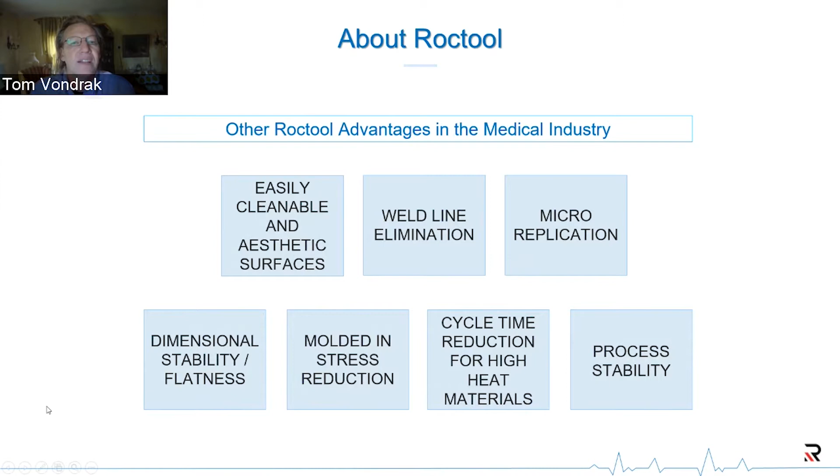Okay, a little bit about Roctool. Roctool is a technology company, and we focus our technology in the area of inductive heating of production tools. We have 190 worldwide patents, and we are a global company. Global in that our staff is from 10 different nationalities. We speak multiple natural languages. We have over 50 plus employees worldwide, and we have over 88 global clients.

We have literally tens of millions of parts produced in our high volume production proven methods for heating tools. And we have systems deployed around the world. Currently over 350 system installations with customers producing production parts.

We provide all the components needed to do inductive heating within your tool. We also provide all of the capital equipment. That can be an induction generator and other peripherals such as an interface module and cooling units to allow you to both heat and cool very quickly. And we wrap all of that with great support globally for installation, for process startup, training, and maintenance, so that at the end of our first encounter, you end up with a molder that knows how to use our system and produce parts and solve problems as they come up. Next.

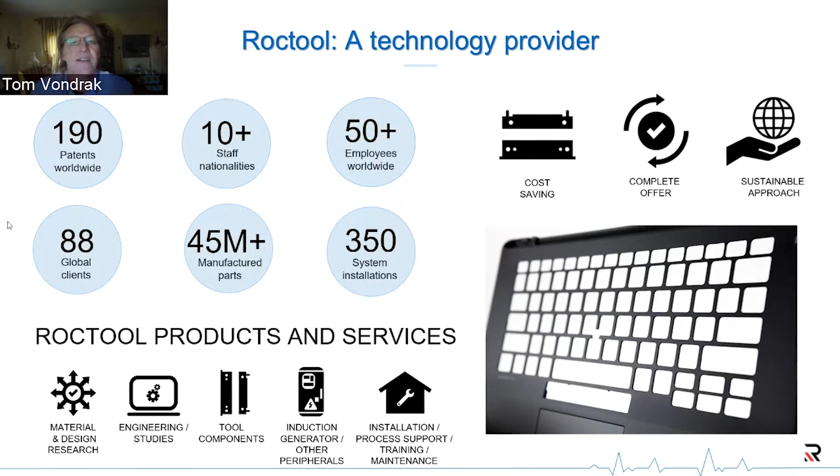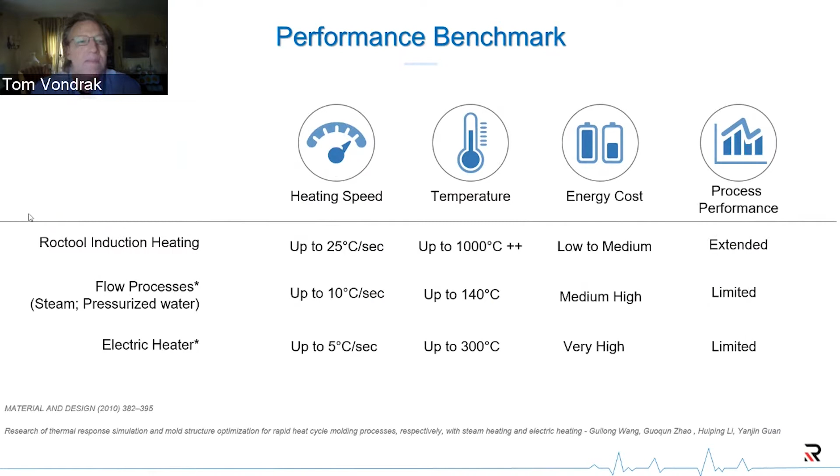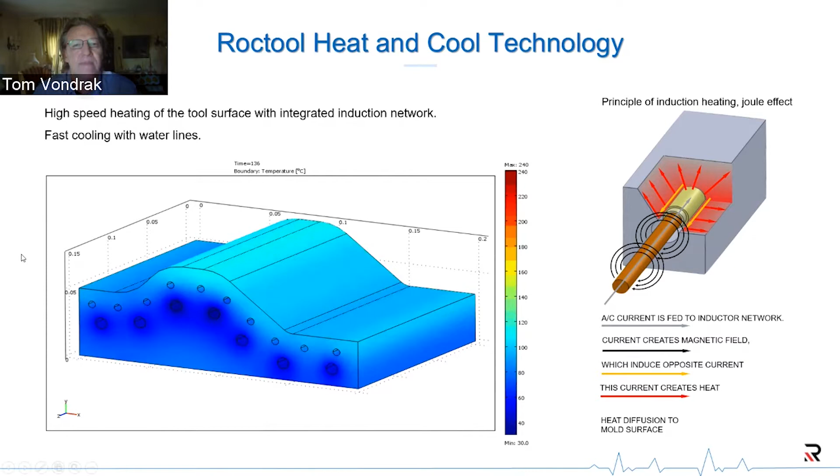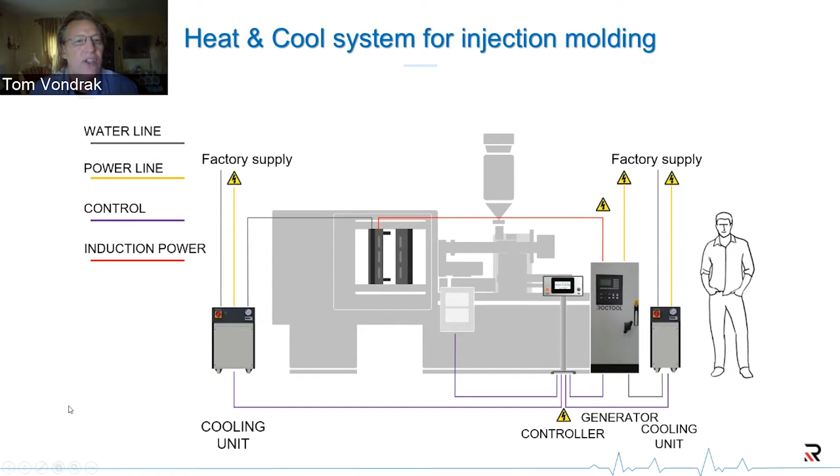Okay, that was very quick. Hopefully you've got an understanding of induction and how we implement it. And I will now turn it over to Vito.

Welcome back again to Belgium, warm and dry Belgium, I guess, as most of Europe right now.

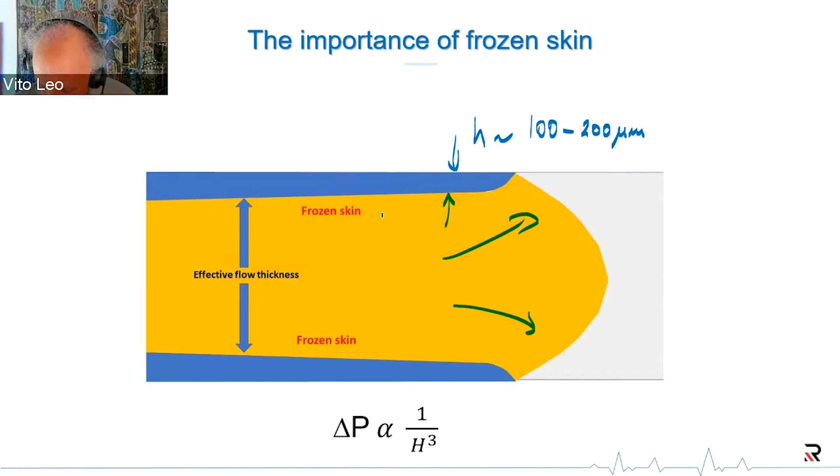Now, what is the order of magnitude of this? It's not uncommon at all to be between 100 and 200 micrometers, so 0.1, 0.2 millimeters. It's fairly typical. Now, you can imagine that if you're molding a 3 millimeter thick part, losing 0.2 millimeters of flow channel on each side isn't a dramatic loss. But if you're trying to make a part of 1 millimeter thickness, or even lower, you have a substantial effect of this reduced effective thickness, because the effective channel for flow is going to be the nominal thickness minus 2 times the frozen skin.

Now it's interesting to go back to some fundamental physics. Physics shows that if you keep everything else constant for a given filling rate and viscosity, the pressure drop you have to fight against, or the pressure you have to provide with your molding machine to fill a given cavity, is proportional to the reciprocal of the third power of the thickness.

Now, if you have a frozen skin, this H is actually H minus 2h, of course - it's the effective channel. I like to use a simplified approach. If we linearize this and think in terms of percentage, we can say that if 10% of the channel is blocked by the frozen skin, that will give you a pressure increase of about 30%. That's because of the cube. So it's just a linear approximation of this complex formula. Every time you lose 10% of effective thickness, you need to add 30% more pressure. So you see it's a very strong effect.

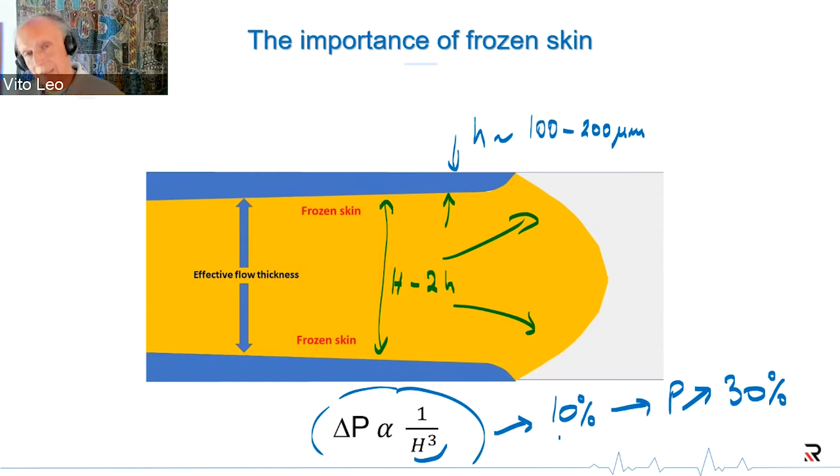And if you can somehow reduce the frozen skin, you could get a huge benefit. Now, 200 micron is 10% of a 2 millimeter plate. Then you have one frozen layer on each side, so with 100 micron on each side, you lose 10% on a 2 millimeter plate. But if you're making a critical medical part that's only 0.8 millimeter thick, you're losing much more than 10%. So you will see an increase in pressure to fill that could be 50, 60, 70, 100% - a very strong increase in pressure. Of course, you could run your mold much hotter, but it doesn't make sense with a conventional process because the timing gets completely off and the economy collapses.

Now let's move to my second and last slide to illustrate the benefit of this process and why it is so useful. The easiest thing to do is go back to a very old plot. For those who have been around a while, they might remember this was the single plot Moldflow was capable of producing 35 years ago, well before finite elements - pressure to fill a cavity as a function of filling time.

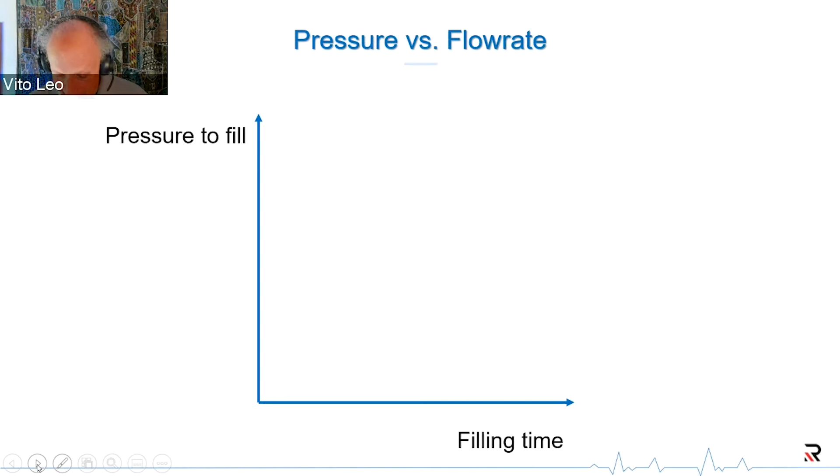It typically looks like a U-shaped curve. So what this means is that if you want to fill very fast, you need to push a lot - that's basic mechanics. You want to go fast, you have to push hard. As you decide to go to a slower filling rate, you need less pressure, so you can fill your part with less pressure. But all of a sudden, in a classical cold mold injection molding process, you will experience a dramatic upturn at some point - the slower you go, the more pressure you need.

Now where is that coming from? From the frozen skin. Because we're going slower, we give more time for the melt to freeze off. The actual thickness of the frozen layer will be higher, so the percentage of blocked channel will be correspondingly higher, and the pressure will go up. It goes up so dramatically that you reach a point where you produce a short shot - there's no way to fill your cavity. That's why there's a concept of minimum filling rate, and a concept of optimum filling time, which you could identify as the minimum of this curve.

Now, if you do this experimentally with a given part in front of your machine, you may not be able to get the full curve, and Mikael will show you some results later. Depending on the part thickness, you might be highlighting more the left side of the graph, or maybe watching more the rising right side of the graph. But in theory, it's a full U curve.

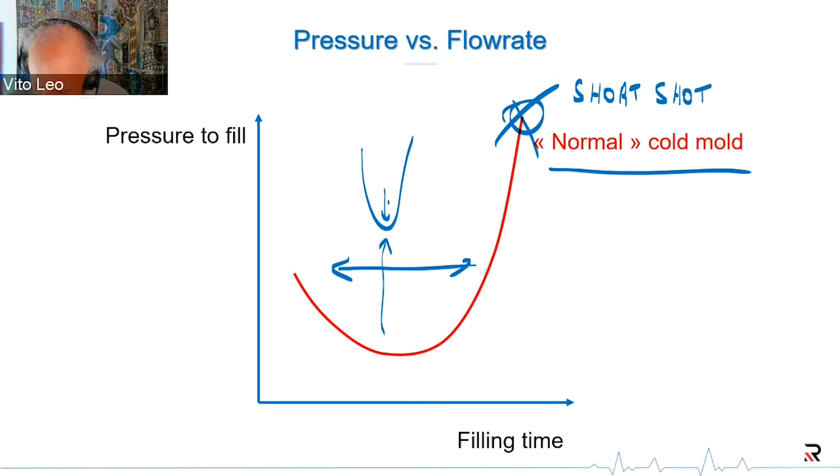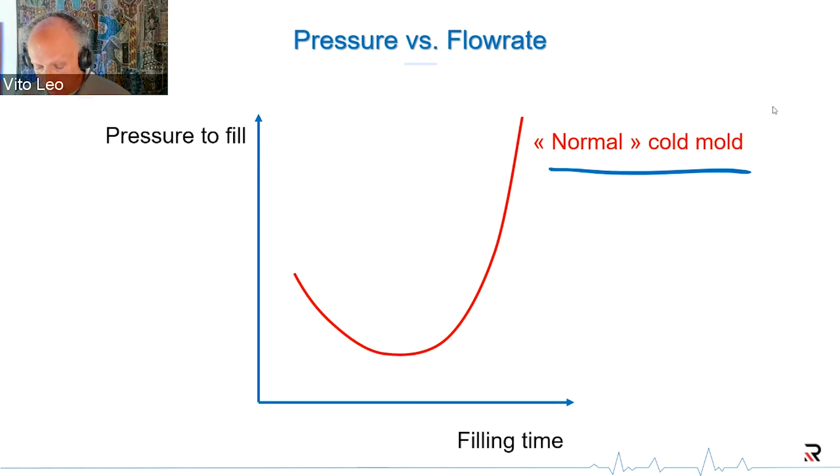Now, before I turn the microphone to Mikael, who will show some results, let me show you on this theoretical U-shaped graph what happens if you're able to use a very hot mold. Now, this is somewhat optimistic, and to be honest, it corresponds to a mold temperature equal to your melt temperature.

Okay, in this case, you have absolutely no frozen skin. You have no melt cooling near the edges, and that will give you this hyperbolic, constantly decreasing pressure. So you can go as slow as you wish, and you could say the processing window is now infinitely wide. Now, obviously, that's not reasonable, because despite the efficiency of the induction heating, you cannot really bump your temperature that high. Technically you can, but it wouldn't be such a great idea in terms of cycle times.

So classically, as you will see in polycarbonate examples to follow, you would put the mold temperature pretty much at the glass transition, which will allow you to have no frozen skin, but it's still cold. It's still 140 or 45 for polycarbonate. So you will end up with something like this. This is a more realistic Roctool-based process, but you see the tremendous benefit in terms of processing window.

I'll give the word now to Mikael, who will show you actual results on disc and spirals just before we move to the live demonstration. Thank you.

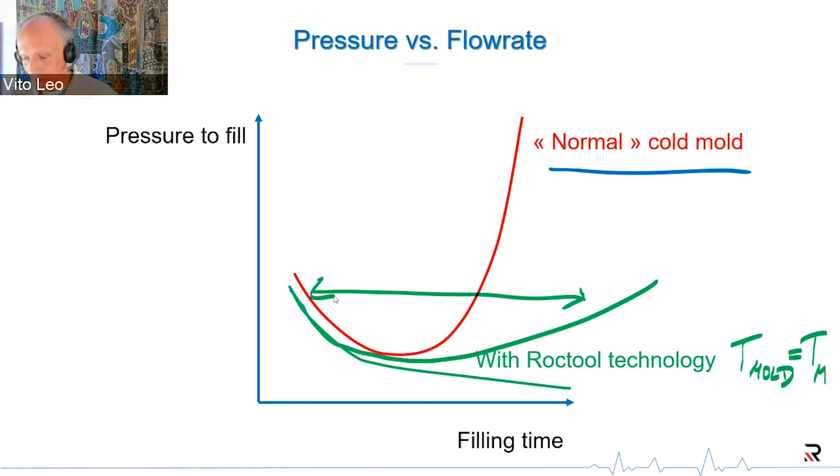Thank you, Vito. So I am Mikael Chailly, Head of Engineering for Roctool in France, and I will present you numerical studies that typically illustrate what Vito presented as a global physical concept.

So if we take a look at this first study of flow extension, we consider a central disk of 300 millimeter diameter with a central injection, and we inject two different materials, two of them being Makrolon grades from Covestro that are used in the medical industry. And we tested different disc thicknesses ranging from 0.5 up to 3 millimeters. We will not present all of the results, but a brief nutshell of certain results.

In terms of mold surface temperature, we have considered three configurations. The first one being the reference for conventional molding, the mold surface temperature would be set up at 90 degrees C on both sides. Then we consider that we have implemented Roctool on one side, so on this side the temperature would start from 160 degrees C at injection start and getting down to 100 degrees whenever we demold the part. And the third configuration would be to heat both sides with the Roctool system with the same temperature profile, starting from 160 down to 100 degrees C.

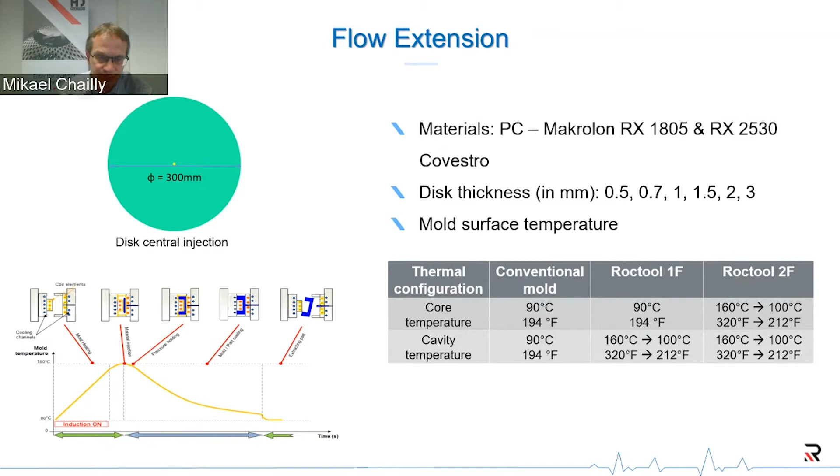So when we talk about those 160 degrees C down to 100 degrees C, we are basically only cooling all the time whenever the material has entered the mold. If we switch to the next slide.

Here we see just a basic illustration of the filling behavior. We have considered one disc at 1 millimeter thickness with one of the two Makrolons, and we have set up a limit pressure from the press, which is 2,400 bars on both sides. Considering about 2 seconds in injection time, we managed to fully fill the disc in Roctool conditions with this pressure limit, whereas in conventional molding we have this short shot that Vito mentioned.

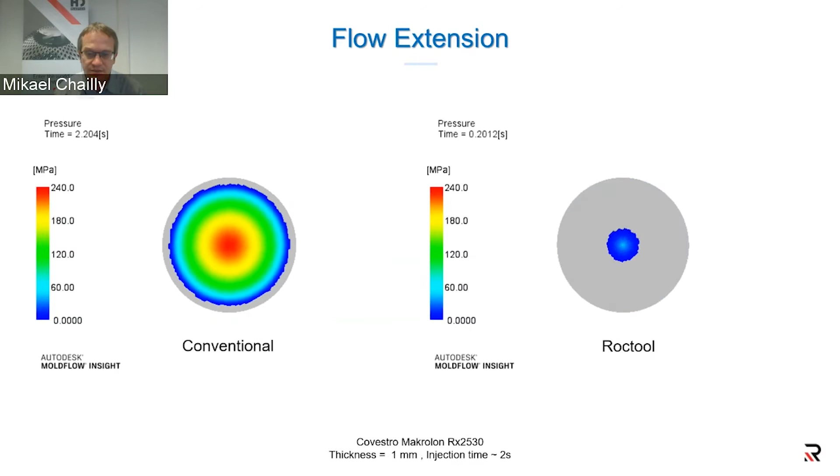Just to give you a brief insight, if we go to the next slide. On this slide, we have the first configuration, which is with a disc of 0.7 millimeter, and we have the graphs that were obtained for the two materials. Of course, with such a thin material, we couldn't fill the full flow length of 150 millimeters, whatever the configuration, because we are reaching this pressure limit. But considering the maximum pressure limit mentioned earlier, we can see that in Roctool conditions, whatever your injection time is, heating both sides, we managed to increase the flow length for both materials. In this specific case, about 20%.

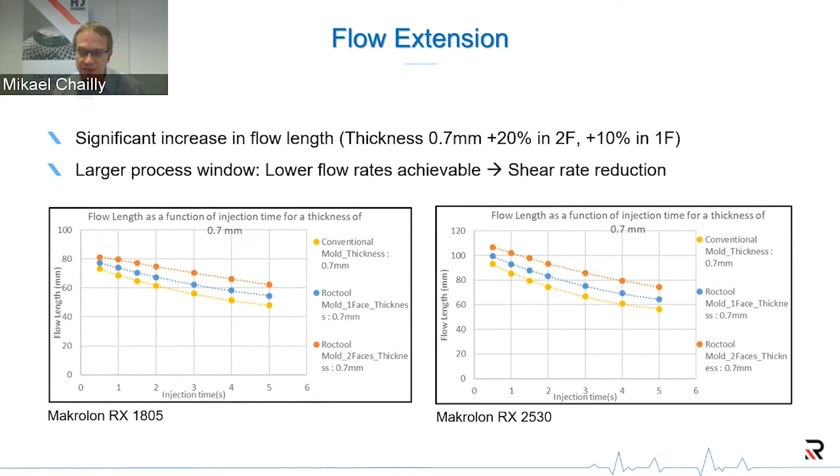If we heat only one side with Roctool, the gain is about 10% compared to conventional molding, which is the yellow curve that you can observe on both sides. So it means that either you could have extended flow length, possibly injecting longer parts with a single gate, or we could also reduce the filling rate by increasing the injection time, which would have a dramatic effect on thin parts, especially for the shear rate generated during filling. So Roctool can help you do that. Now, if we go to the next configuration.

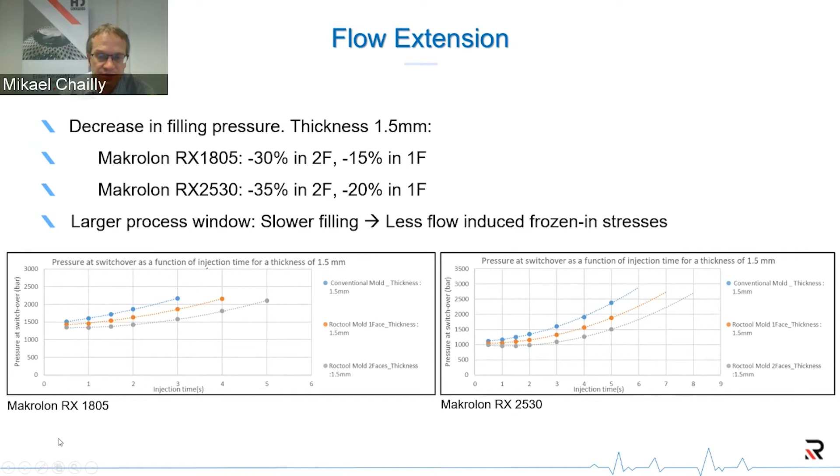Now we're done on this one and we can move to the next one.

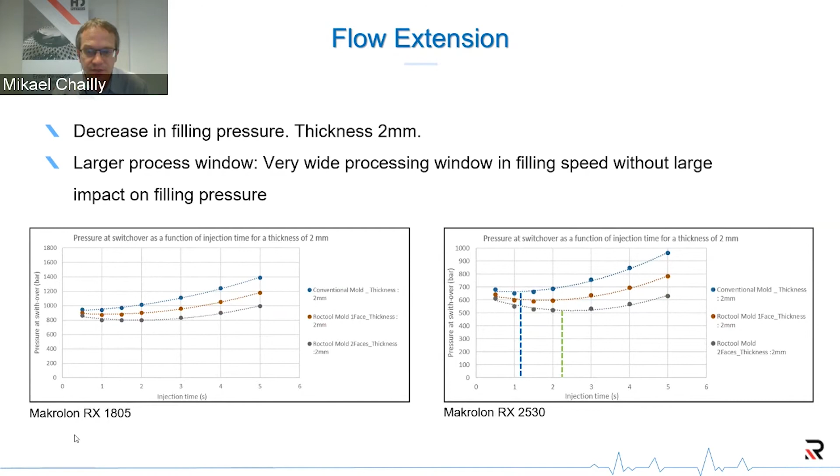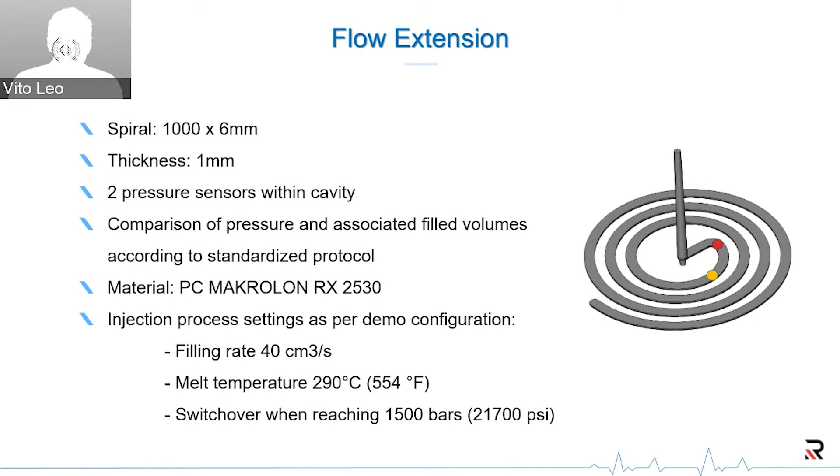So if we go to this second study, which was made for the spiral flow, we have this mold that we have available internally or at partners, where we have this very classic spiral flow. We can use different thickness; in the results I'm going to present, we're looking at a thickness of 1 millimeter, using the same Makrolon material, the 2530. We have two pressure sensors located within the cavity, shown as red and yellow spots on the picture on the right. We compare whatever pressure we obtain and associated filled volumes according to a standardized protocol to evaluate the gain in terms of flow length for a given material grade with the Roctool technology.

For the injection process settings, we used exactly the same as you will see on the live demo: a filling rate at 40 centimeter cube per second, and melt temperature of 290 degrees C. We fill until the injection pressure reaches 1,500 bars, and then we switch to a pressure controlled filling for an additional 3 seconds.

So if we take a look at the results on the next slide.

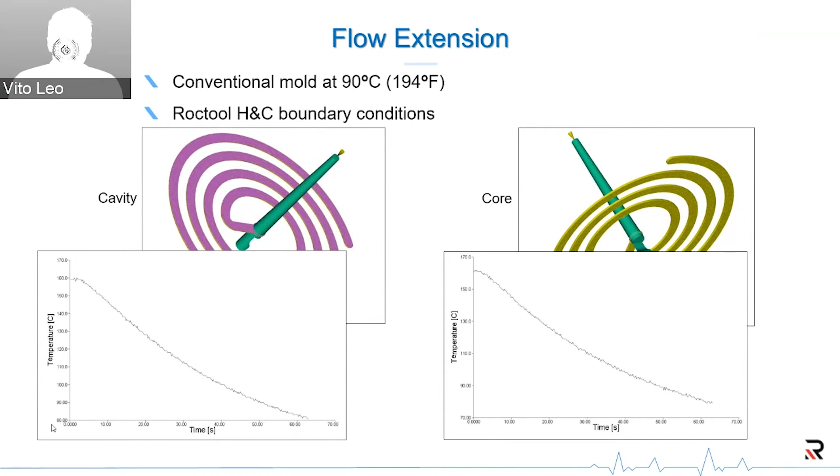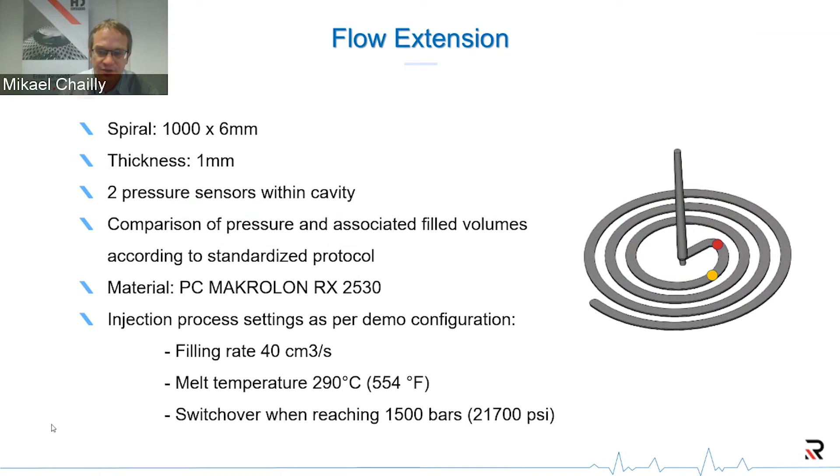Before going to the results, just to mention the thermal behavior of the mold: the comparison was made again on a conventional mold considered at 90 degrees C. Now you can switch to the next one with the temperature curves.

So we have this conventional mold at 90 degrees, and we compare it to what we have in the spiral flow mold, which is two-side heating with Roctool technology. What you see is that we start with 160 degrees down to 80 degrees in this configuration. The curves you have were directly obtained from thermocouples located within the mold from the trials. Now if we go to the next one.

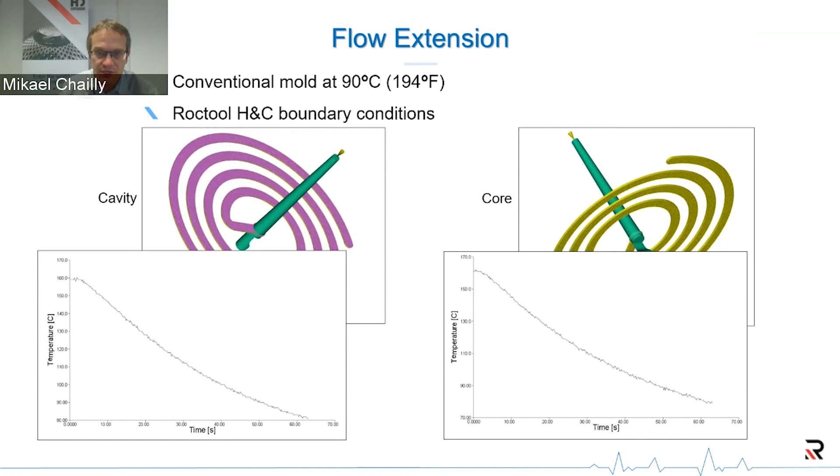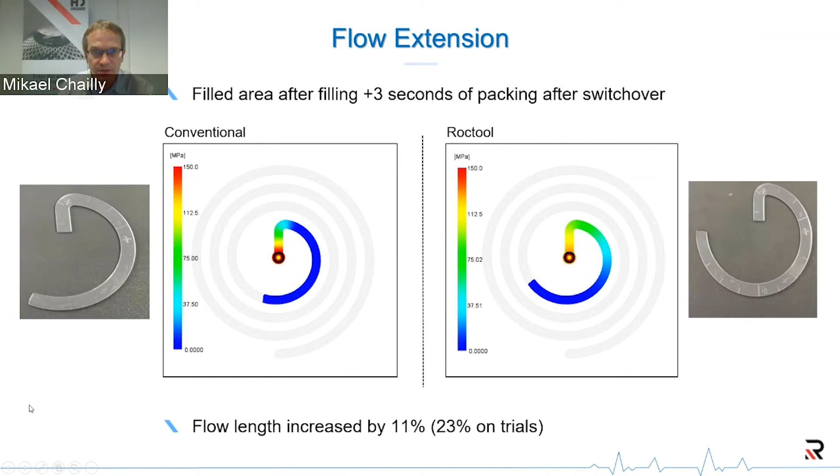If we go to the next one. Mikael, this is Vito. Just to let you know, we are running a tiny bit late, so we'll have to move on a bit quicker, maybe.

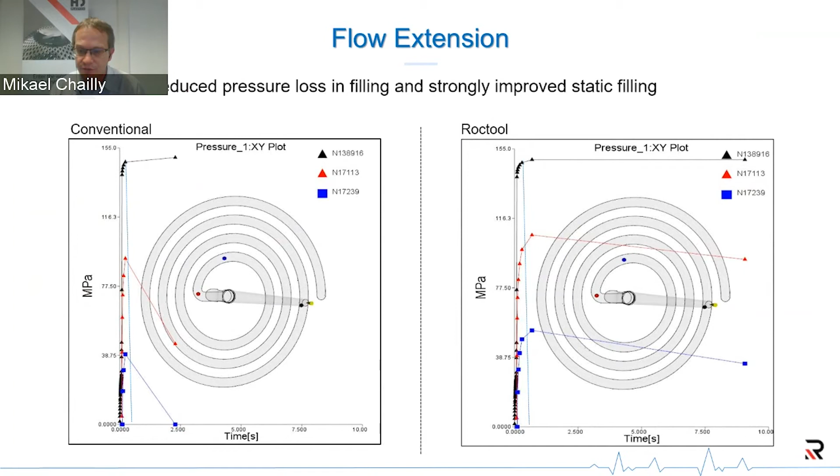So you are able either to continue the filling or to pack efficiently if you were working on a real part. If we go to the next one, here you can see that we can also improve this flow length extension, because we have seen results of about 20% at 160 degrees C for Roctool conditions compared to the conventional one.

But we can totally adapt the process settings, and possibly go up to the melt temperature, but keeping reasonable values, we could for this PC use a mold surface temperature of 180 degrees C, and then this flow length would extend up to 40%. So just adding an additional 20 degrees on the mold surface, you double the gain that you can expect. With this ability to do this only through process settings, you have the ability to optimize whatever flow length gain you would have, and of course it would also impact the cycle time. So you can choose whatever best compromise you want just through process settings.

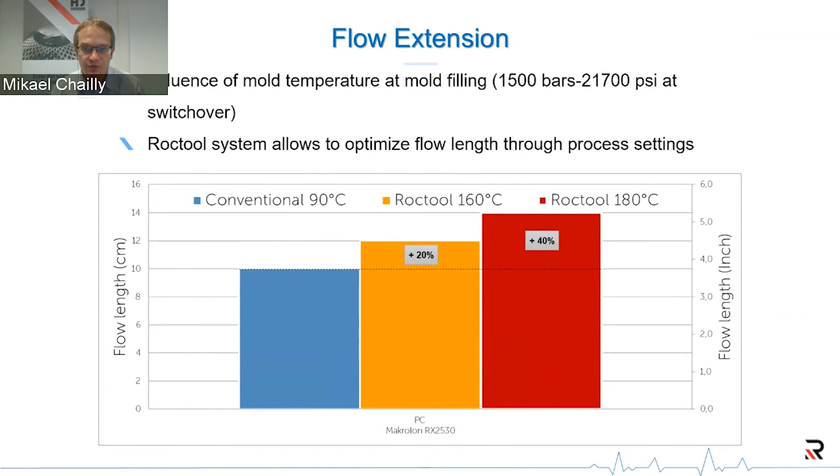And if we go to the last slide, here we have some examples of measurements we have run in our facilities. We have what we call the HDP database, where we characterized several materials, dozens of materials, in terms of flow lengths, surface aspect, gains, etc., offered by the technology. We can see that we have very various results. In this graph, the first one is the one from the study, the PC Makrolon, that is the second one from the left.

If we consider a broader view, we can see that if we change the material type, let's say from PC up to, and compare that to the PEI family, we can see that the gains are not the same. As an average on the PC family, we are about 75% in terms of flow length improvement with the material. On the PEI, which is a much more viscous material, the flow length absolute value is of course less because of the viscosity, but the gains are more like 125%. Now even if we focus on a single family, the PC1, the blue square on the left side, we can see that depending on the grades and whatever modification polymer suppliers have made to their materials to fit your requirements, we can have different viscosity behavior, so strong variation of material gain. It is really recommended to run some testing for a given material to evaluate the potential gain in terms of flow lengths for a given grade.

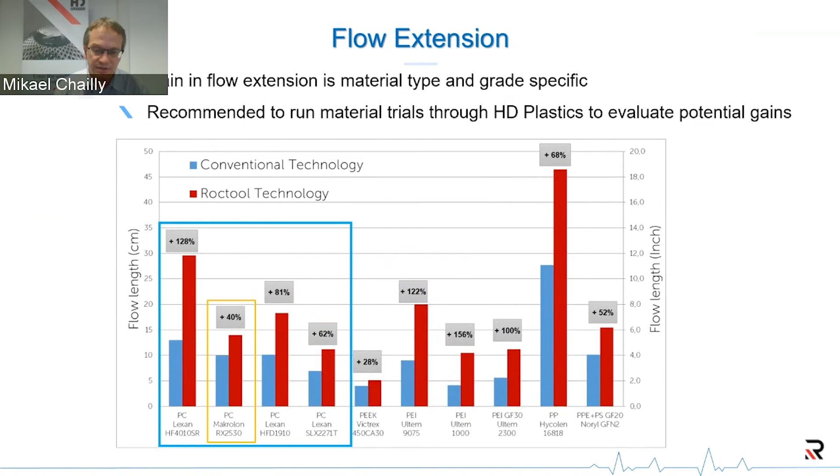And that is something that also Roctool can offer. And now I'm done, and I will let the live demo happen.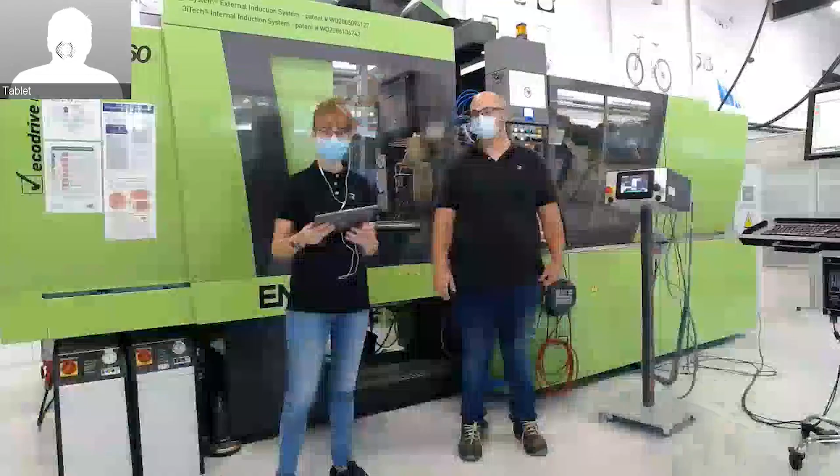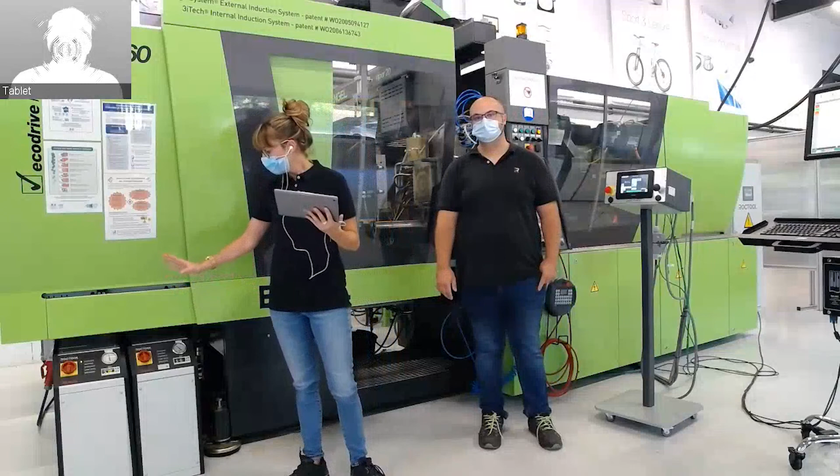Thanks Michael, and welcome everybody to our demo center. Today the goal of this demonstration is to show you how much Roctool can improve the flow using our technology compared to conventional. We will use the same polycarbonate that Michael presented, with our injection machine. Here we have a 160 ton machine and our Roctool equipment, our thermal regulator, one for the mobile side and the other for the fixed side, and our controller. Now let's see our injection mold.

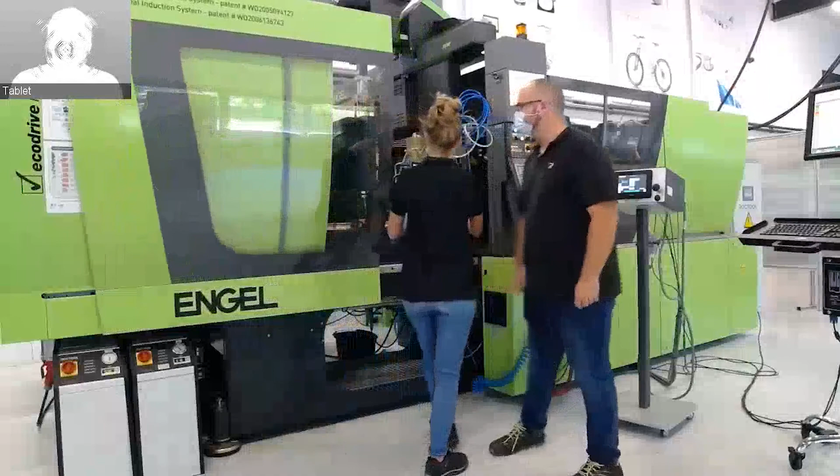So this is a spiral mold flow at 1 millimeter of thickness with 2 pressure sensors inside the cavity from RJG.

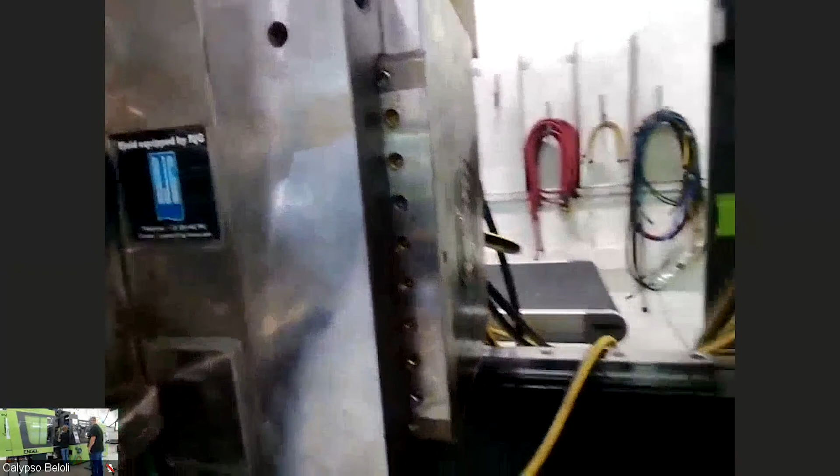So David will start the injection with Roctool on.

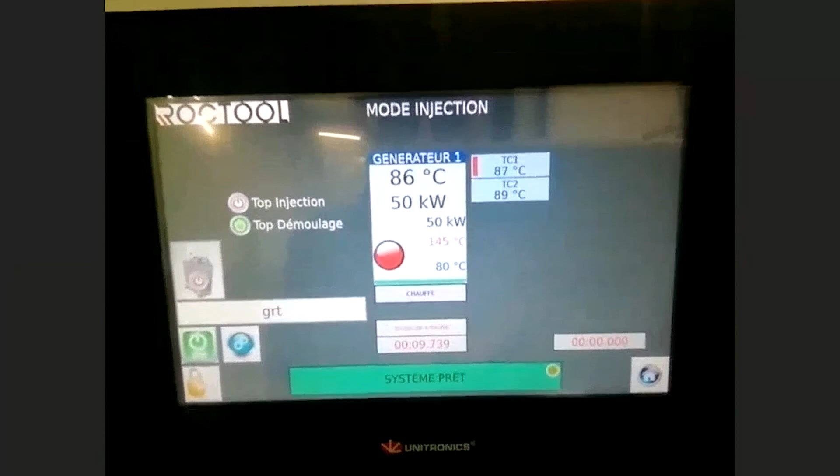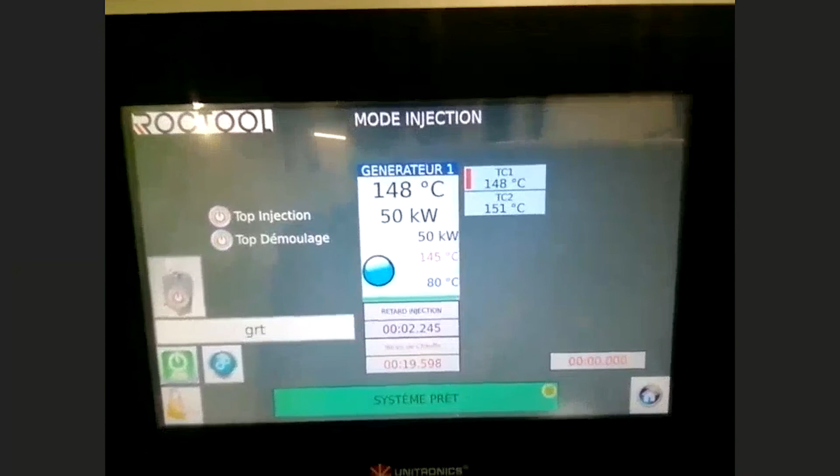So if we have a look on our controller, we can see that the mold temperature is increasing and we are waiting to reach 150 degrees as Michael showed you. So the condition for that is to fix on our controller 145 degrees, and then we will wait some seconds in order to have a perfect surface temperature homogeneity.

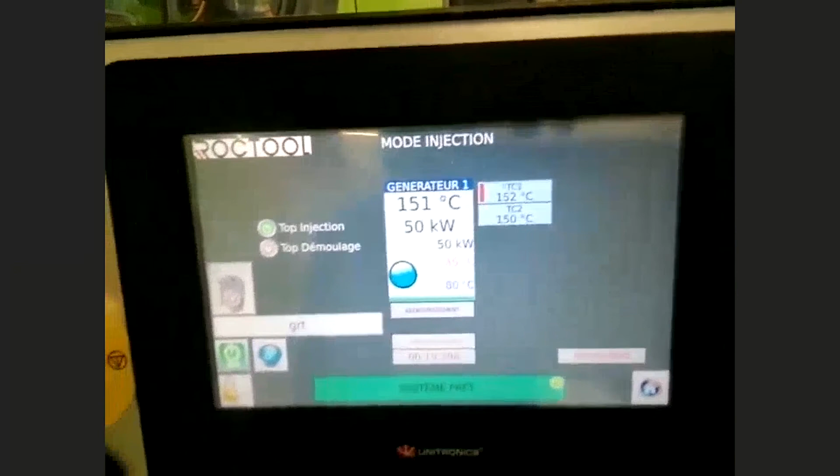So we inject just now, and the cooling starts, and we will wait to reach 80 degrees for the demolding.

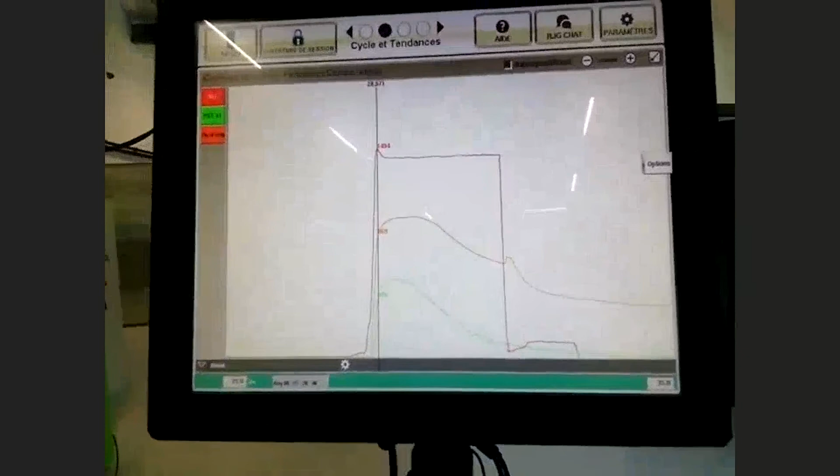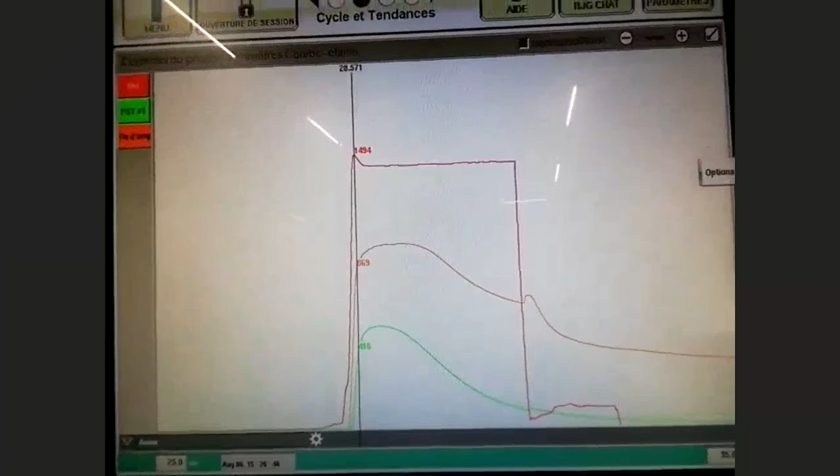On this equipment, we can see the curves of the injection pressures. In red is from the injection machine, and in orange and green from the sensors inside the cavity. So as you can see, we inject at 1500 bars, like Michael showed you during his presentation. And we can see the evolution of the pressure inside the cavity.

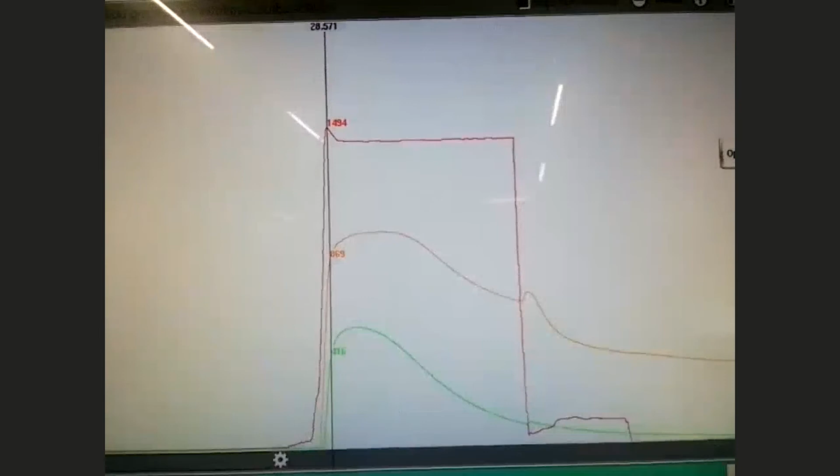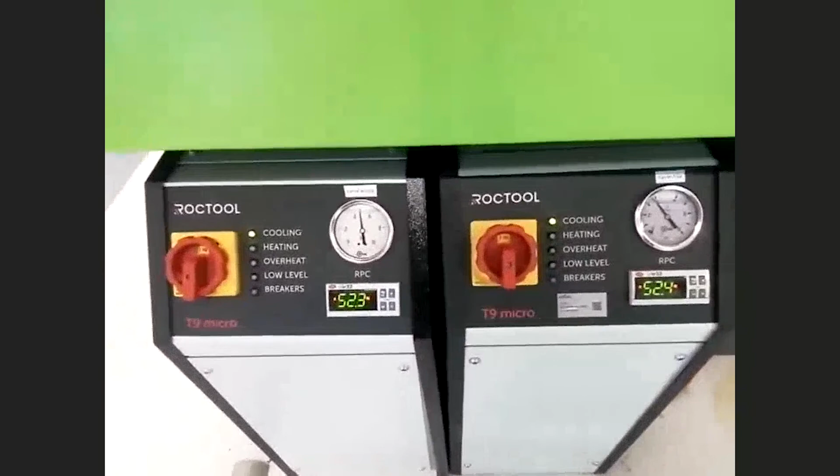So then, on our thermoregulator, you can see that we fix at 50 degrees for the cooling.

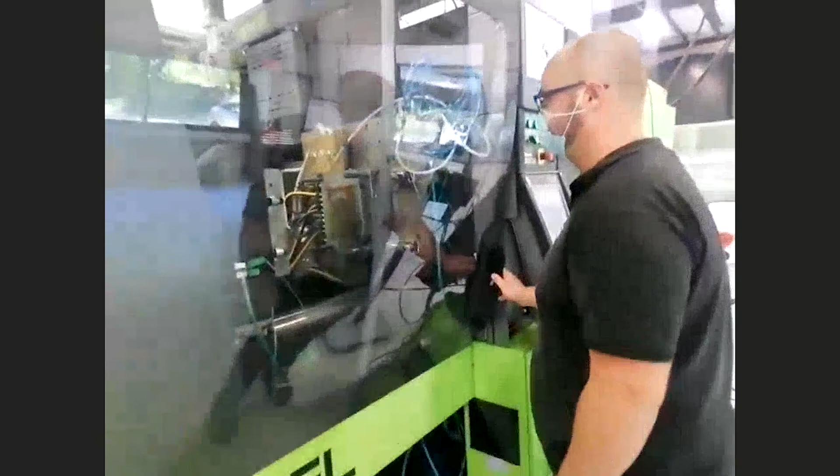Now we can see with David the parts and which length do we reach. So David? 12 centimeters with Roctool on.

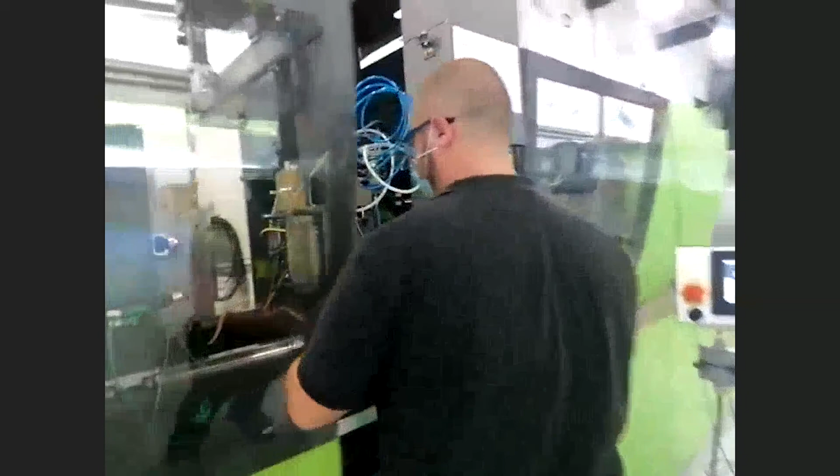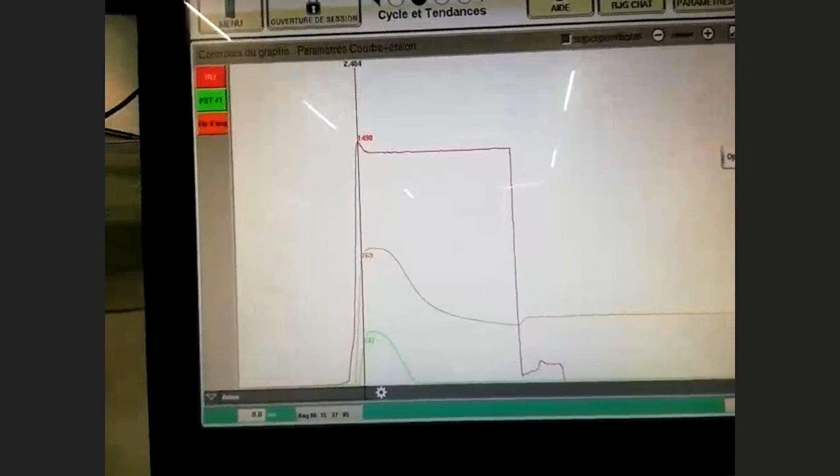So now we will turn off Roctool and start the injection at 80 degrees. In this case, we don't need the controller, and we can see again on our EDAT system from RJG the evolution of the pressure inside the cavity and from the injection molding machine.

So here you see that we inject at the same pressure from the machine, 1500 bars, and you can see in orange again and in green the evolution of the pressure inside the cavity. So it's clear that we increase without Roctool the pressure drop.

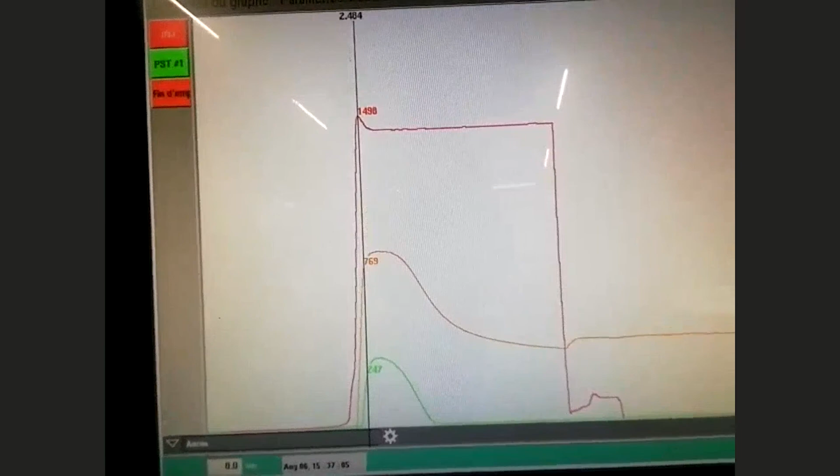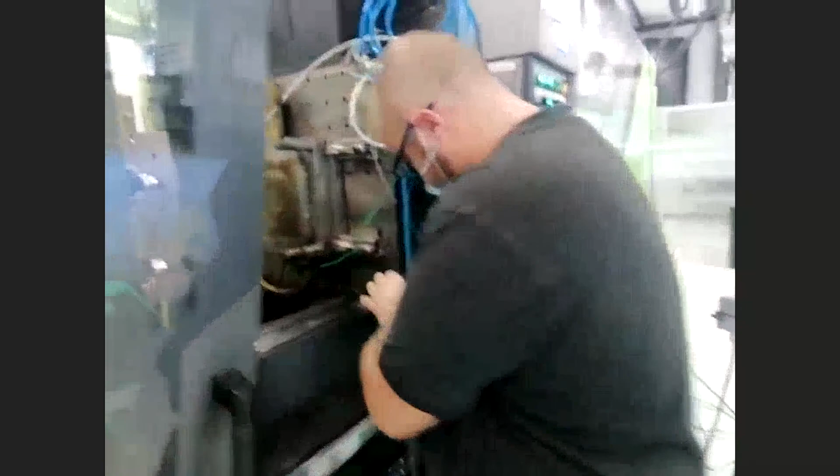So now we will see the part injected without Roctool, and in this case the length that we achieve is 10 centimeters. Okay, 10 centimeters. So to sum up, we can have a look on the part here.

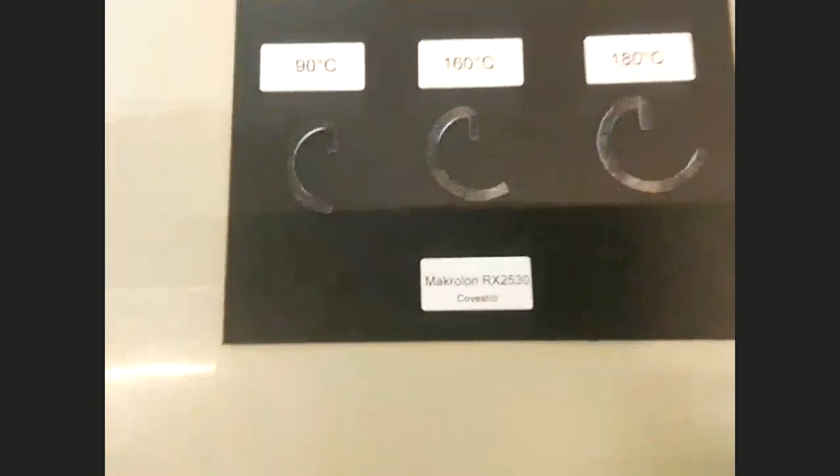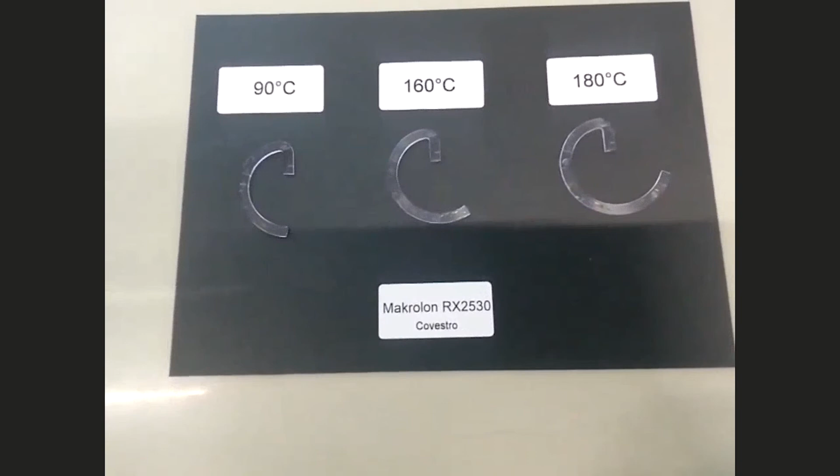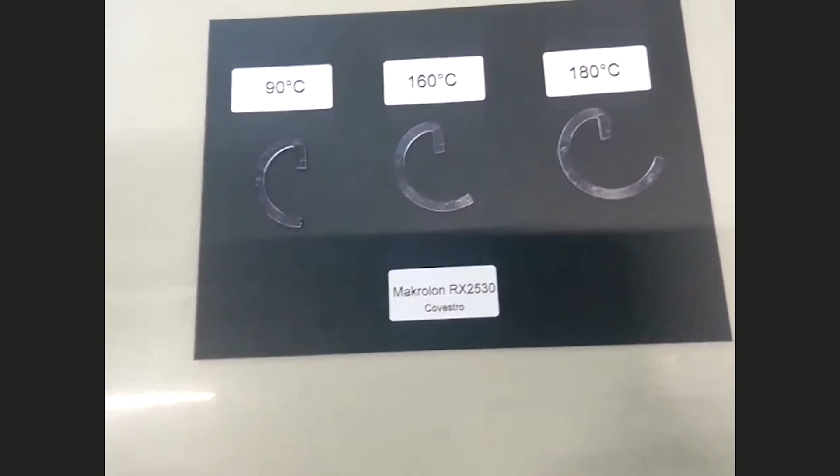So we inject during this live demo at 90 degrees in conventional and at 160 with Roctool. But as Michael showed you, we also have an improvement of the flow if we increase by 20 degrees, so at 180 degrees. So to sum up, with Roctool, you have a capability to improve the flow length, and depending your application, you can choose which temperature is the best case for that.

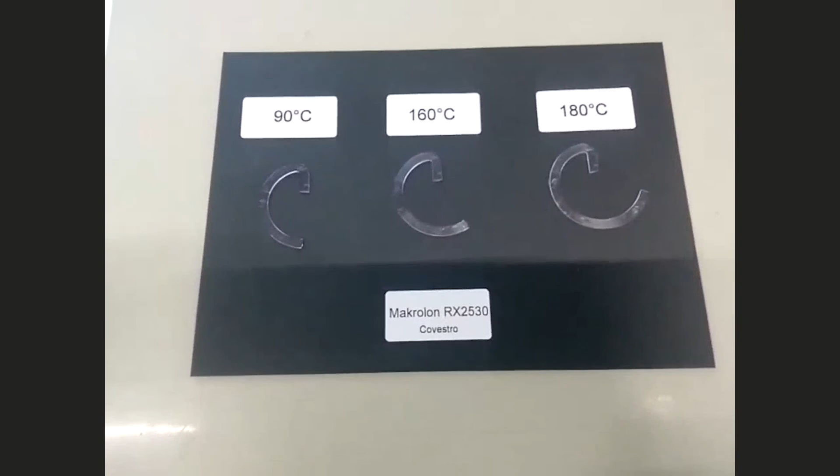And now it's time for Vito, Tom, and Michael for the question and answers.

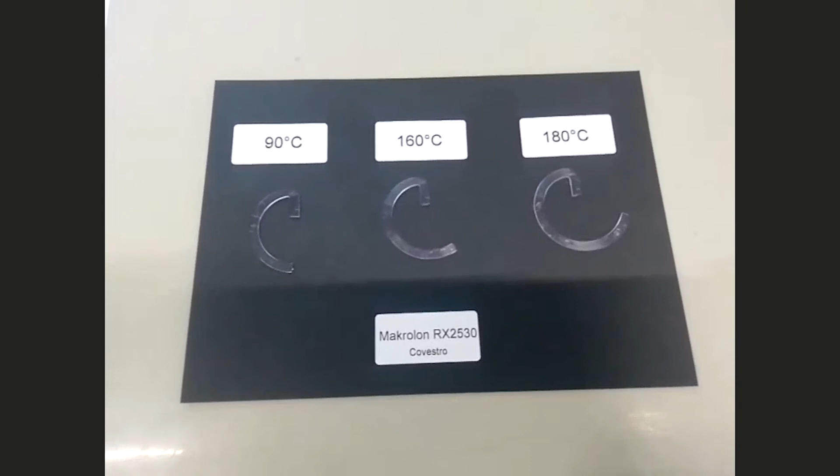Yes, thank you. So this is Vito back. We've had one or two questions, and one that I think Tom could answer here is the one from Leonard, who says, if you are heating both sides of a mold, does that mean you need 2 generators for that?

Hi, this is Tom here, and I did type in an answer, and I'll give it verbally as well. In most cases, yes. If you are heating in 2 separate zones, one zone being on your A side, one zone being on your B side, you would want the independent control for heating that comes with 2 separate generators.

I would say it is possible in cases where it's a very well-known ratio of heating you want between the two zones. We can do a single generator to heat multiple zones. That is less common though, because usually we want to have the freedom to independently control the power on the fly, and we want to give that freedom to the processor to be able to independently control the amount of power going to each generator zone. Hopefully that answers the question, and back to you, Vito.

Yeah, Leonard is also pointing that, of course, we did not stress much the positive effect of this process on the packing phase, but people who watched closely the curves would have seen that because we are delaying the freeze off of the material, that means you have extended packing time and better, lower volumetric shrinkage overall.